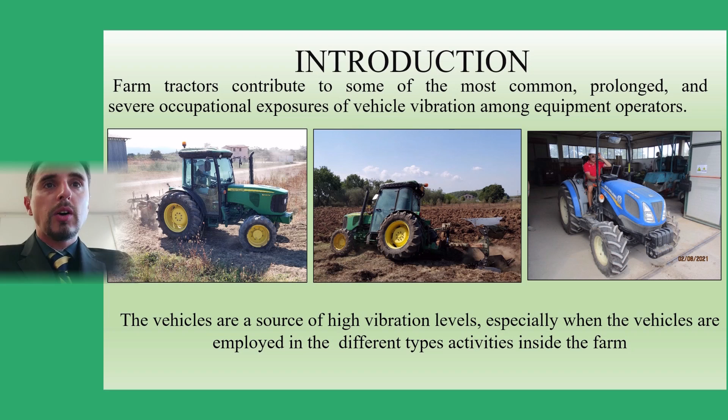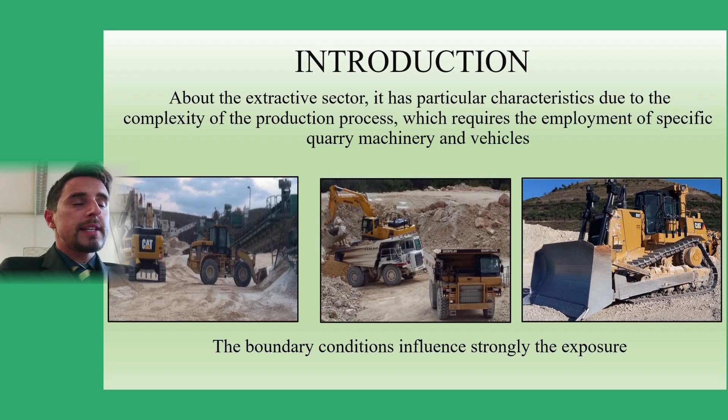Farm tractors contribute to some of the problems for the workers' health hazards during the daily activities, because the tractors are a source of high vibration levels, especially during different operations in the farm. The same problem is present in the quarry activities during the production process, where specific machinery and vehicles are employed. The boundary conditions strongly influence the exposure, for example, the ground conditions.

Another example is the LHD, load haul dump vehicles, that represent a specific potentially dangerous source of human health hazard, due to many factors, because during the travel the driver is exposed to high-level vibration generated by rough terrain, heavy loading and haul travels.

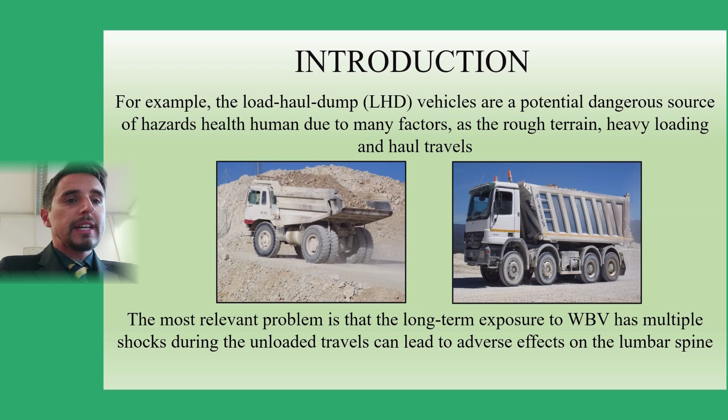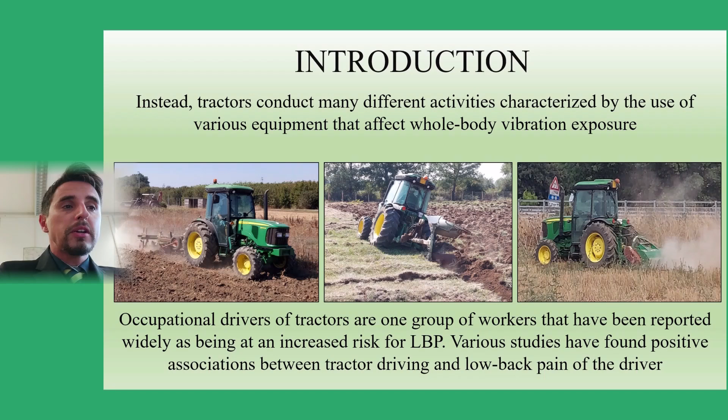The whole body vibration is characterized by multiple shocks that can generate negative effects on the lumbar spine of the drivers. The same problem is present in the farm activities, where the use of different equipment for the tractors affects whole body vibration exposure and generates high-level vibration that can lead to negative effects on the workers' health. Various studies confirm that long-term whole body vibration exposure can generate negative effects, particularly low back pain of the driver.

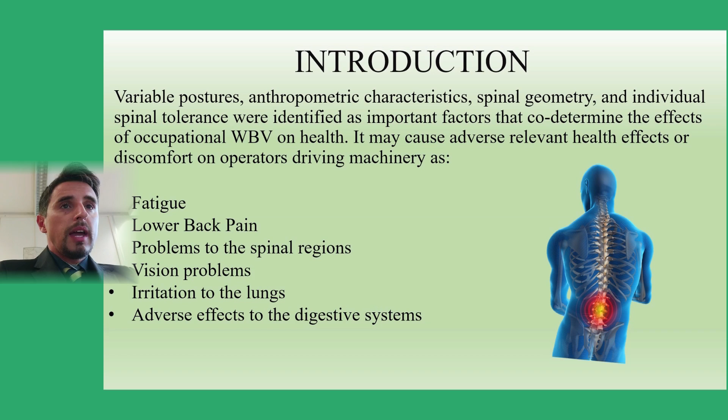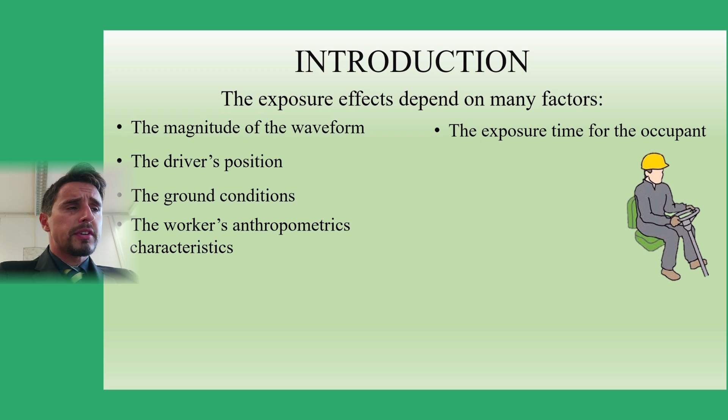The effects of whole body vibration exposure are different. For example, fatigue, lower back pain, problems to the spinal region, vision problems, and many other negative effects. In particular, the exposure effects depend on many factors: magnitude of the waveform, the driver's position, the ground condition in the farm and in the quarry, the worker's anthropometric characteristics, the exposure time for the occupant during the daily activities, the types of vehicle, the speed of vehicles inside the quarry site or in the farm.

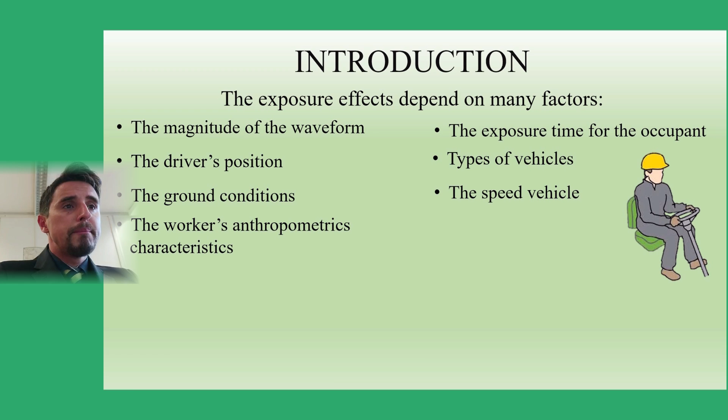But the most relevant problem is that there is not yet enough epidemiological evidence to outline a clear relationship, and the health disorders are not connected to the real exposure of the driver.

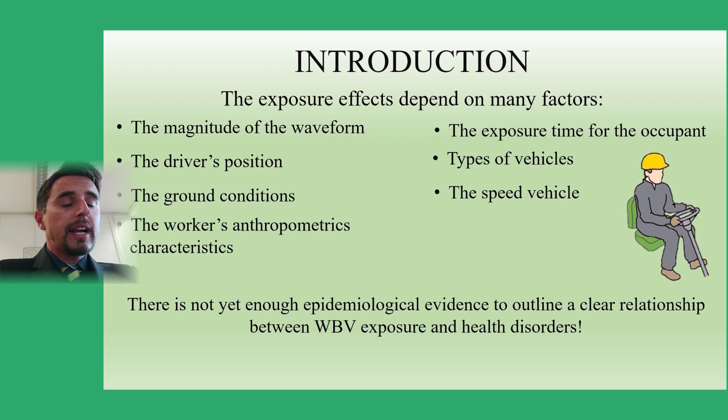In order to assess the whole body vibration exposure, the international standard shows the measurement methods and indicates a health caution zone for a definite time. The time is defined as 8 hours, and furthermore, it's necessary to point out that low back disorders are generated in the particular context of the farm by the ground condition, and in the quarry site also by the same problem, the ground condition. This fact is very important because the highest levels of vertical vibration, for values more than 0.5 meters per second squared, can generate relevant disorders.

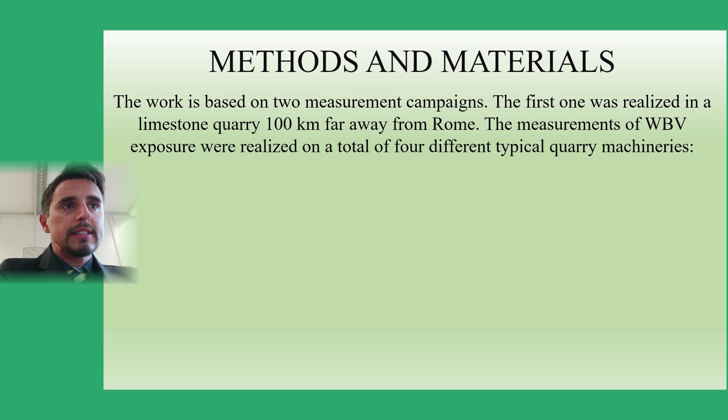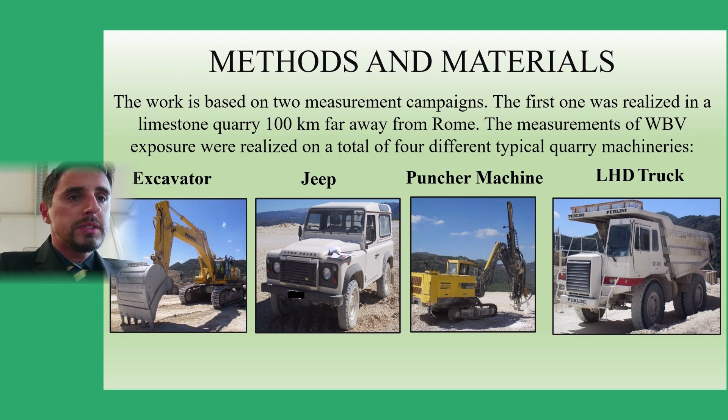In this paper, we have realized two different campaigns. The first one was realized in a limestone quarry 100 km away from Rome, and the measurements of whole body vibration were realized on 4 different typical quarry machineries: the first one an excavator, the second a jeep, the third a puncher machine, and a load haul dump truck. In the second measurement campaign, the same measurements were realized at the university in a specific farm with the same boundary conditions on different types of tractors, New Holland, John Deere, and another type of New Holland tractor.

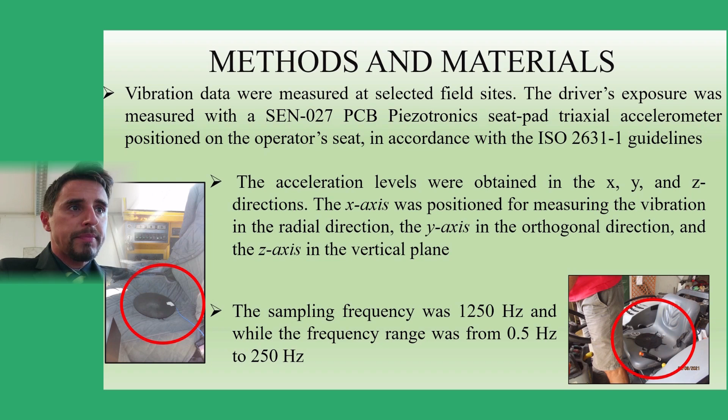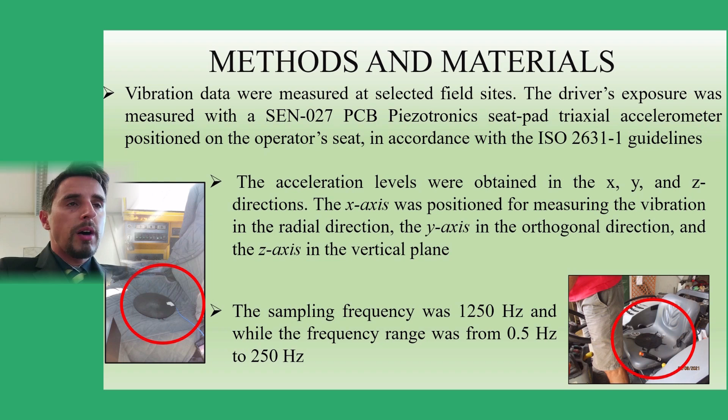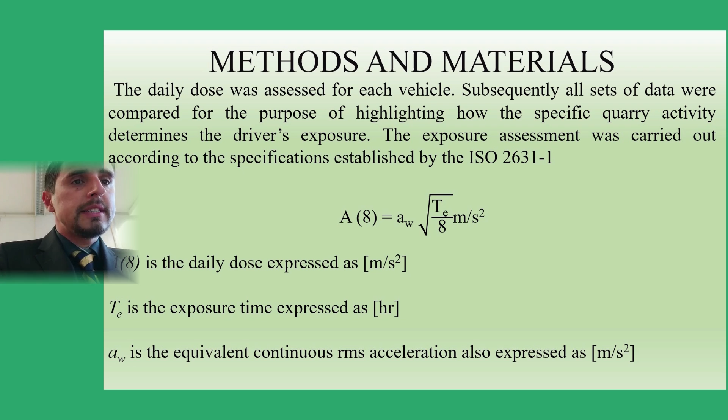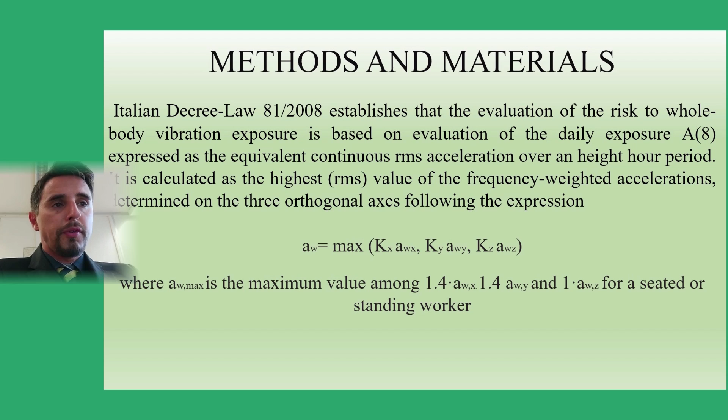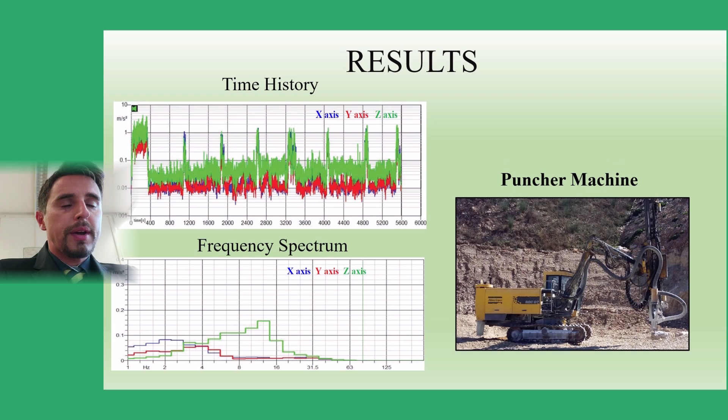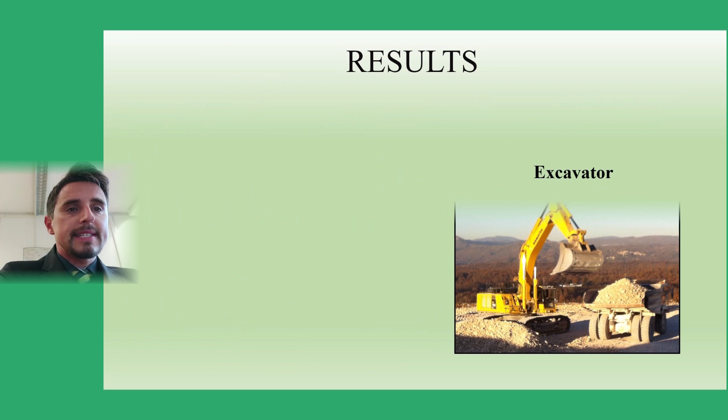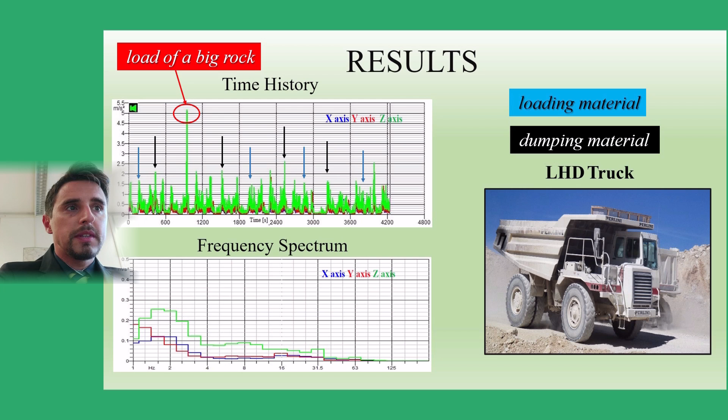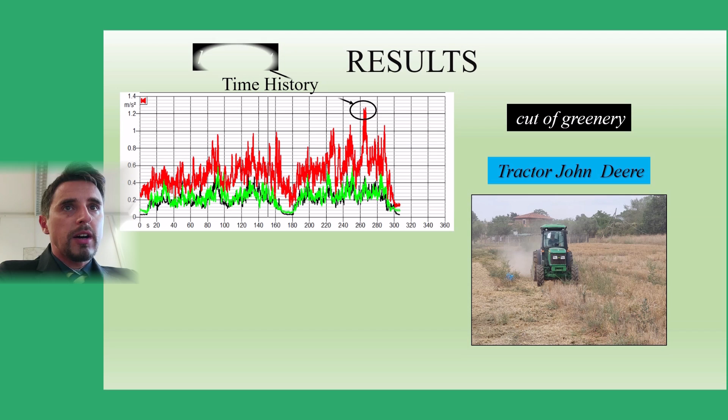We can see here the same effects for the tractor John Deere in the farm measurement campaign. This is the time history of the operation cut of greenery and the relative effects of the hard plant and the frequency spectrum. At the same time, we can see here the time history of the tractor John Deere during a tillage operation and the frequency spectrum.

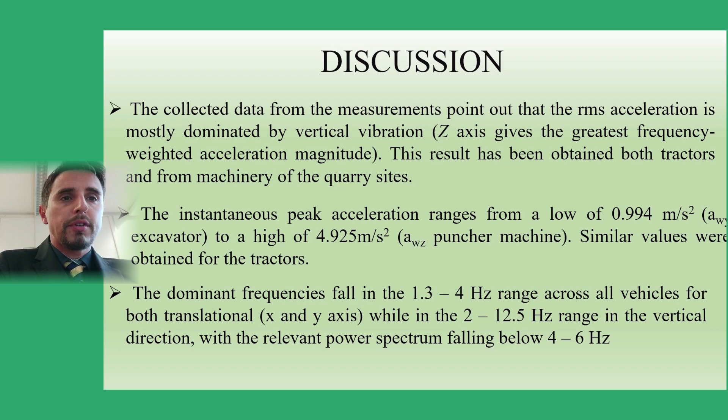And finally, we can see that during the measurement campaign, the vertical vibration is the direction that dominates all the measurements. This result has been attained for the tractors and for all the vehicles in the quarry site. The instantaneous peak acceleration and the dominant frequency are defined in a specific range of values. Particularly, the dominant frequencies range from 1.3 Hz to 6 Hz for the tractors measurement and for the quarry vehicles measurement.

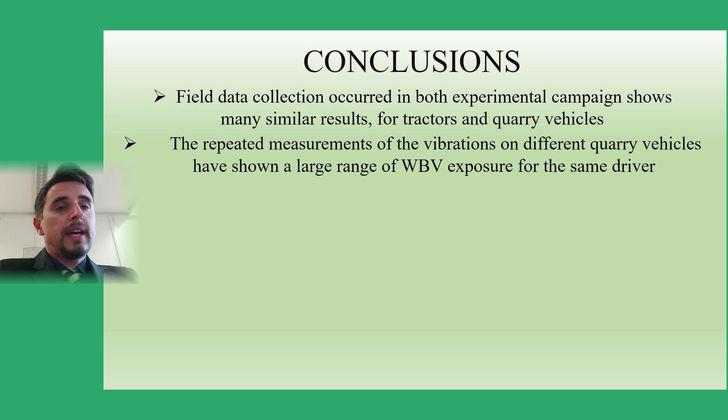Field data collection in both experimental campaigns shows many similar results. It's necessary to point out that for both measurement campaigns the boundary conditions are similar, but for the tractors the specific task strongly influences the real whole body vibration exposure for the driver. The measurement was repeated for the same driver on the different vehicles in the measurement campaign of the quarry site and in the farm measurement campaign, and the exposure dose value is strongly influenced by the time exposure and the intensity of the vibration signal of each vehicle, for the tractors and for machinery vehicles.

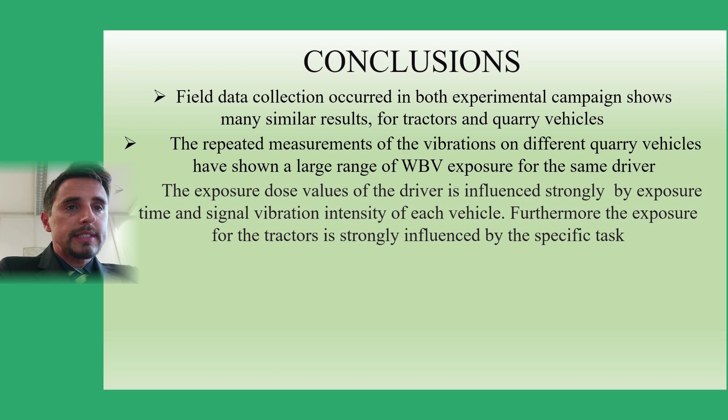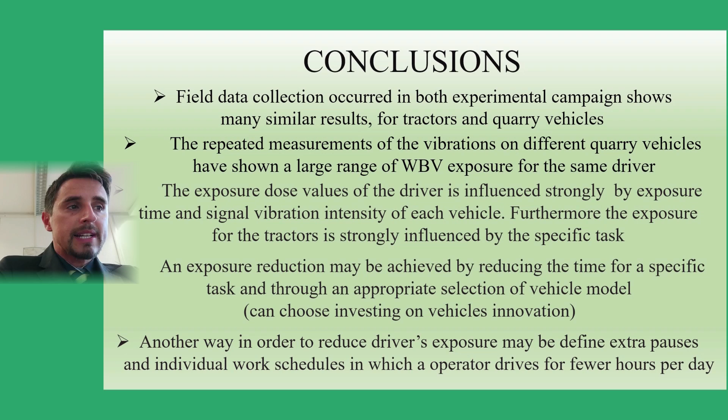Furthermore, as above, the tractor's exposure is strongly influenced by the specific task. And in order to reduce the whole body vibration exposure for the drivers, we can think about changing the machinery and scheduling the drivers' activities with extra pauses in order to reduce the effective time exposure.